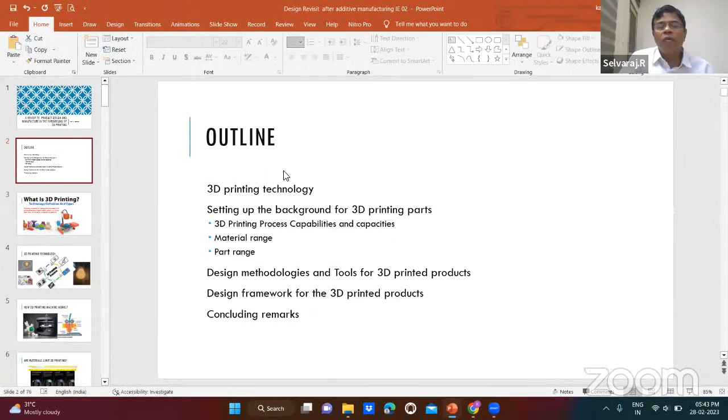Okay, so I'm sharing my slides and we will begin. Yes sir, please sir, please sir. Yes sir, it's okay sir. Okay sir, again go ahead sir.

Today's topic is of much interest because 3D printing technology is unavoidable now, and any technology will impact the products that humankind will use. Similarly, this 3D printing technology also has a very high impact on design. That is what we are going to look into. The topic can be looked at from two perspectives: one connecting with design, and the other connecting with manufacturing. So it is a perfect combination of topics so that we will get the benefit out of the technology.

My presentation will be structured like this. We will have a small review on 3D printing technology, and then I will set up the background for taking up 3D printed parts design. In that setup, we will discuss different 3D printing technologies available and their capabilities and capacities, the material range for making 3D printed parts, and the part design complexity range. Then we will have a small note on methodologies and tools used for 3D printed products.

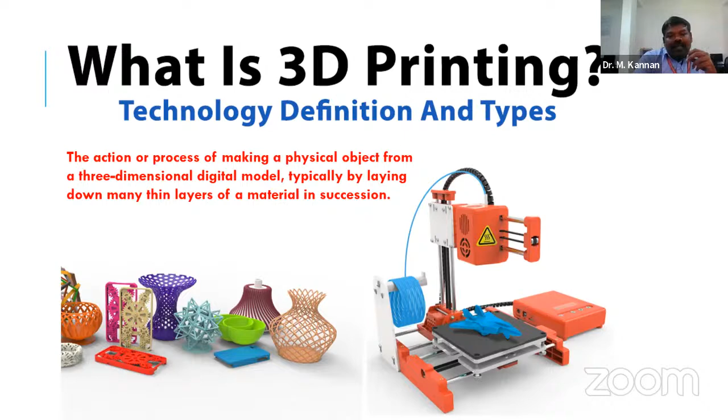The printing technology follows these steps: for any 3D printing, we must have a CAD model, and the model will be converted to a common file. There are a number of additive manufacturing file formats now being introduced, but still the very popular file is the .stl file, which is a tessellated laminate. This file is then supplied to a software called slicing software or material preparation software, where it is sliced, and the slices are converted to G-code so that the printing machine can print the parts. This is the general process.

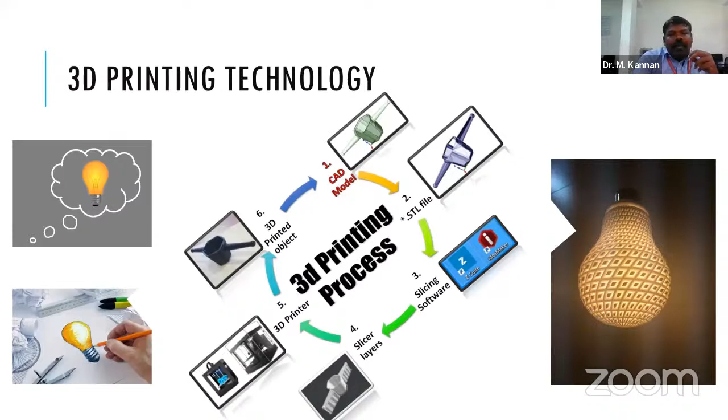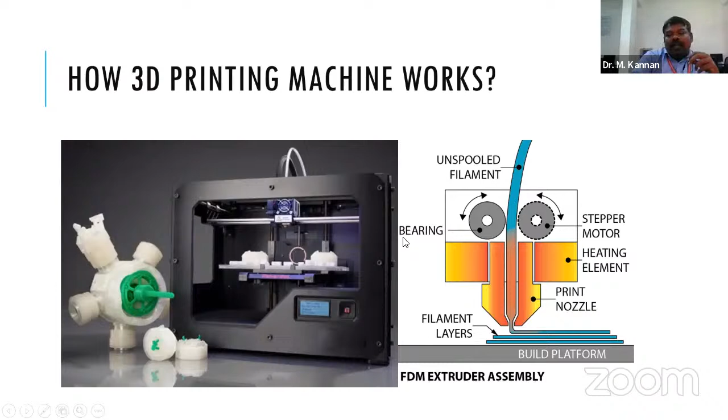To know how it works, this is a very basic 3D printing technology, and it is the earliest 3D printing technology - fused deposition modeling. It will have an extruder, mounted on a machine that takes motion in X, Y, Z axis, or it can even be fitted on a robot. So it acts as only a thrower of material, and it can be fitted with any moving machine so that we get generated parts.

First of all, we must know, is it limited to only plastics? That is not so. Surprisingly, you can see that now 3D printing can be done even with Inconel, the hardest material, and similarly we can even go for tool steel.

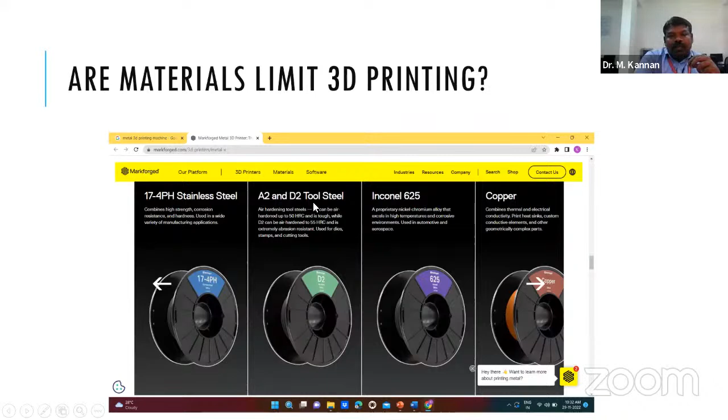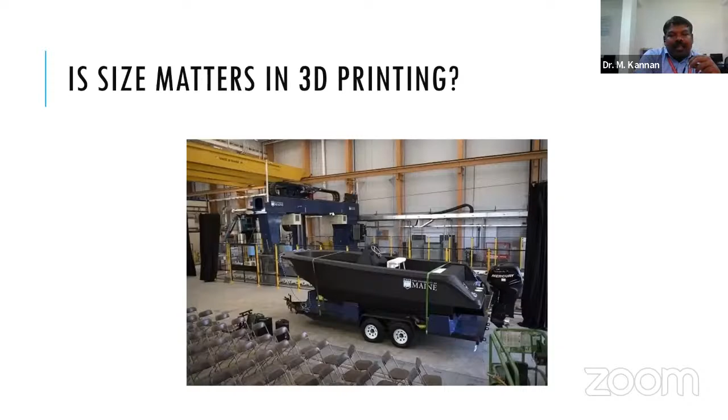Is size a matter of question? That also is false. You can see that a complete speed boat hull will be printed by the 3D printer, and the size also you can see how large it is. So size also does not matter.

And the capabilities - what you are seeing is a 3D printed heart, and on the other end you are having even 3D printing used to construct a home or large structures.

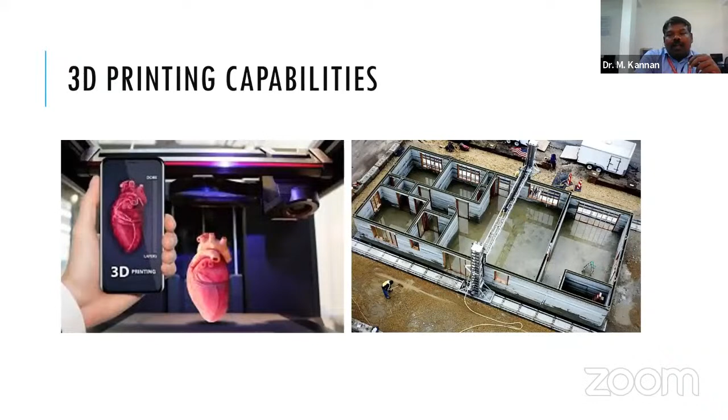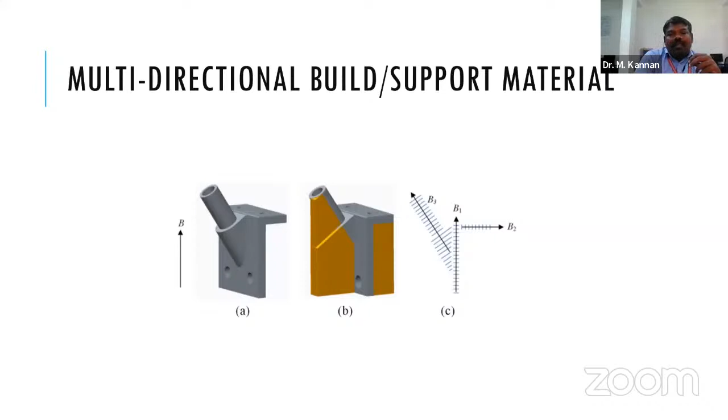Other capabilities of 3D printing - now we have a slicing algorithm that does multi-directional slicing, so it is not limited to any complexity of the parts. Altogether, this parts information is converted into G-code.

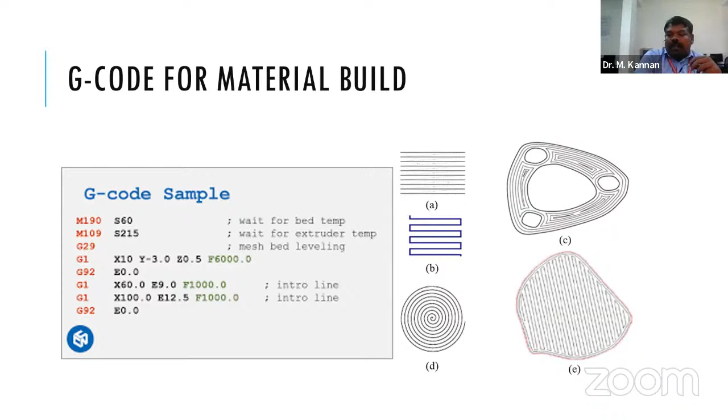This is to tell the viewer, the listener, how things are working. This is very similar to robotic machining or CNC machining, only instead of a tool, we are using an extruder, and there are other technologies also that we will see. In association with 3D printing technology, we have a 3D reconstruction technology hand in hand with it.

This is where designs come into picture. So the 3D printing technology has changed the whole scenario of design. In that case, all the parts, machines, or equipment that are available can be redesigned or re-engineered, which will save money, cost, and operational cost.

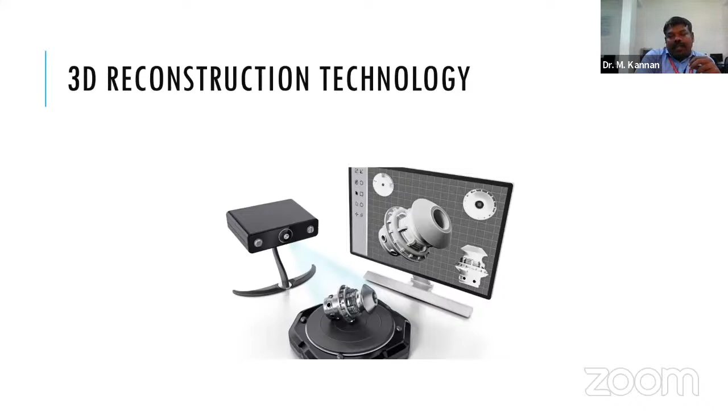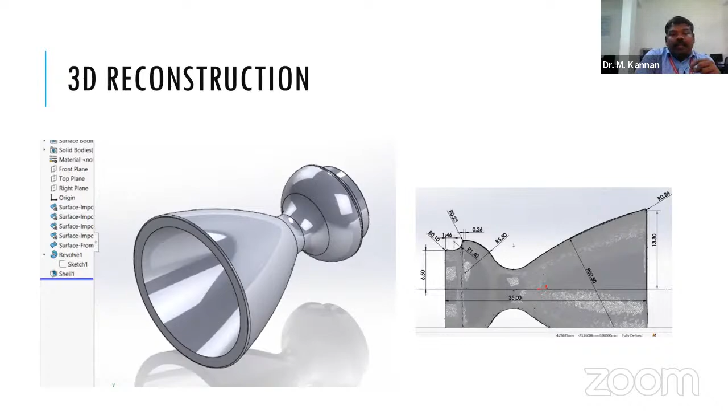For that, this 3D reconstruction technology is the one that will support it. So you need not have the 3D models - rather you can scan the model, and then it can easily be converted to a CAD model, which can be printed later. There are a number of tools available for converting the scanned object into CAD models. This shows you how 3D reconstruction technology will help you in capturing even a rocket nozzle.

Now we will take a look at the 3D printing technology ranges. I'm not going to cover the very basic plastic-based 3D printing machines. Rather, we are going to take up a complete spectrum of metal 3D printing technology. There is no limitation in usage of materials now, and you can see that even sheet lamination - the sheets will be cut for the required geometrical aspects, then pressed and heat applied to get a complete part.

Rather than only fusion, now we are having sheet metal lamination, stereolithography, and selective laser sintering. This 3D metal printing technology has completely changed the face of 3D printing technology. Earlier, it was only a prototyping technique.

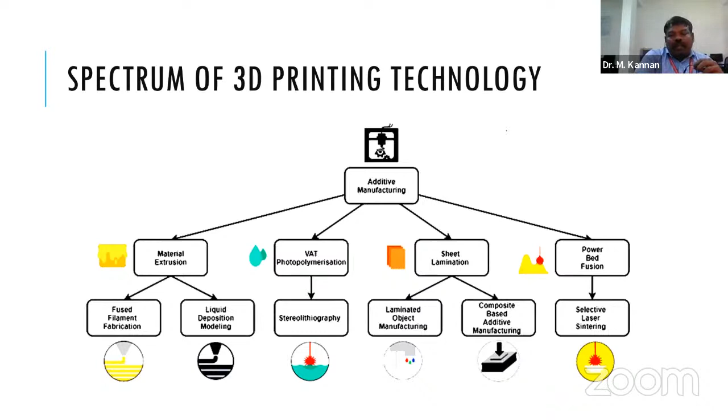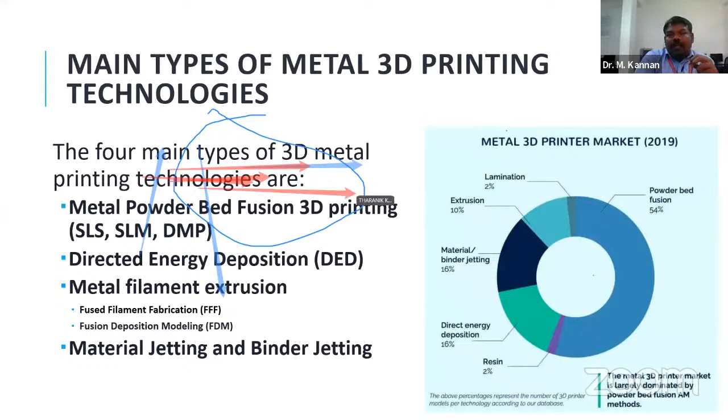Here, metal binder jetting is used mostly, about 16%, for direct part manufacturing, and similarly direct energy deposition is another method that can be used. You can see that resin paste is starting to become smaller in usage for real-time product manufacturing when it comes to 3D printed parts.

Someone is throwing up some scratches. Unshare it and share it, sir. That will be all right, sir. Somebody is playing. Please stop playing on the screen.

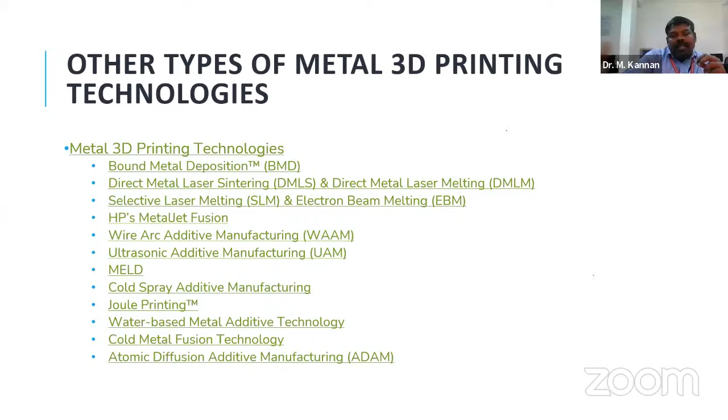These are the other range of 3D metal printing: bound metal deposition, selective laser melting, wire arc additive manufacturing, and even arc welding additive manufacturing. So you can imagine the range of products available for 3D printing.

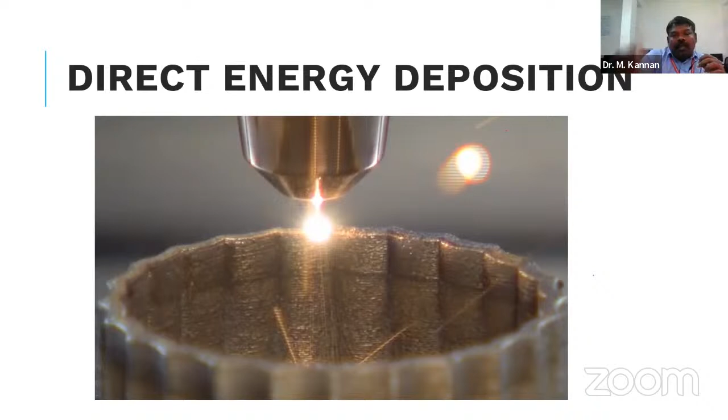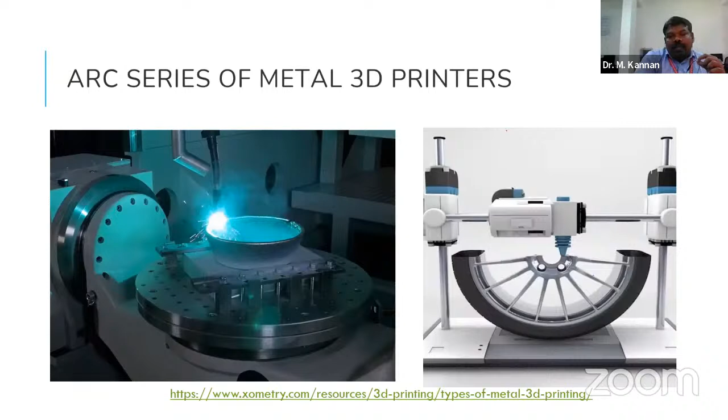This is the direct energy deposition method. It uses plasma for melting even very hard material to get fused. This is arc series lamination for getting a 3D print, and you can see a complete wheel which doesn't have any separate parts welded or jointed.

Optical and lens principles are also used. Electron beams are focused so that a very selective part with selective material and microstructural composition can be manufactured. So there is a high chance for controlling the microstructure, which we must know about, so that it's possible to manufacture a product sufficiently, independent of materials.

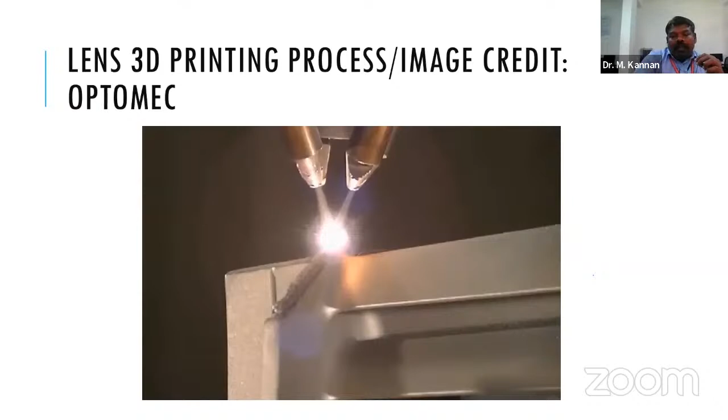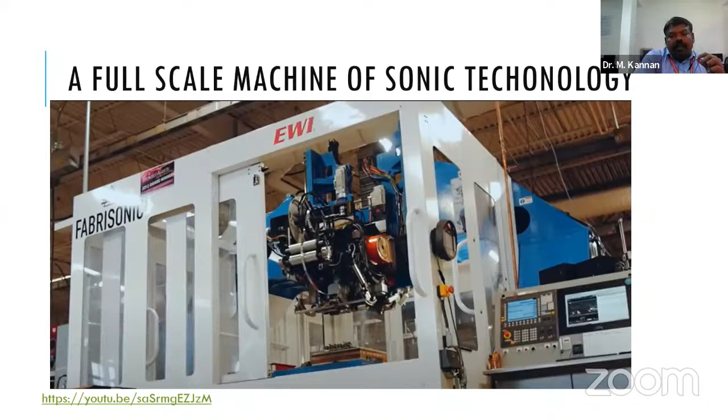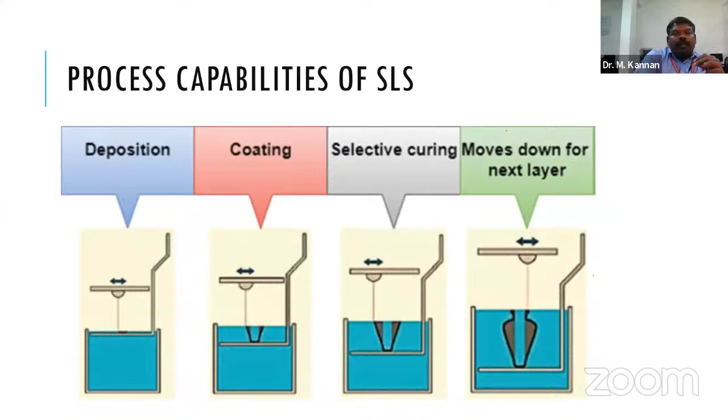So this is the capability of 3D printing technology now.

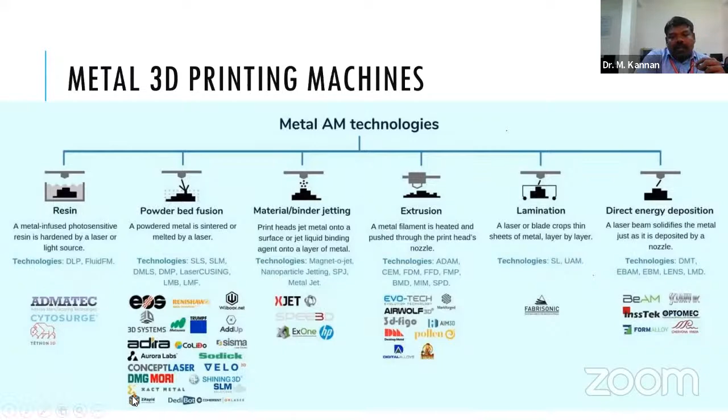This spreads out the spectrum of machine suppliers - different vendors providing different kinds of machines. Earlier, 3D printing had a limitation of speed; it would take a higher time to make even a single layer. Now speed is also being addressed, and there's a chance to use multi-material in part manufacturing, which frees the designer from material size constraints and allows optimizing design for strength.

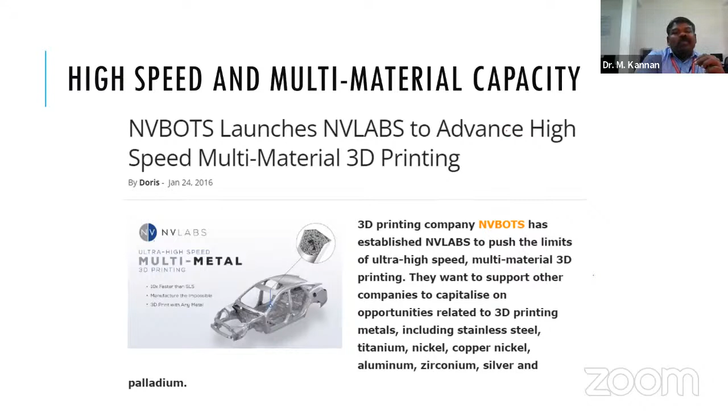So you can manufacture any size of parts or assembly together. 3D printing technology sets aside the need for separate parts and assembly - rather a whole product can be manufactured in a single shot. That is the present capacity of 3D printing technologies, so this is the range to understand.

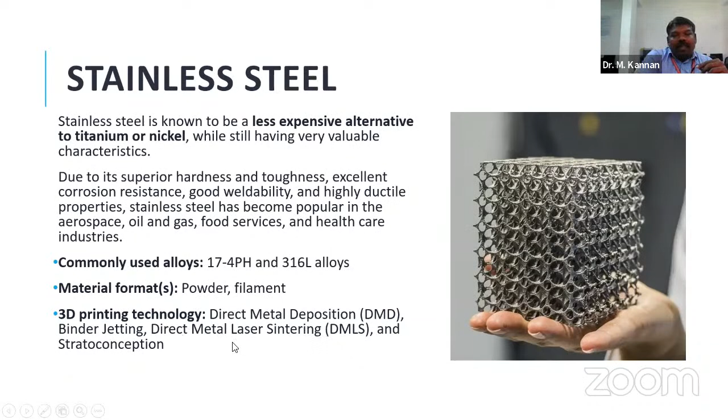I'm giving you the material and the supportive process here: direct metal deposition, binder jetting, direct metal laser sintering, and so on. Even maraging tool steel, which has high strength and fracture toughness, is available in powder and filament form, and the range of alloys is given here.

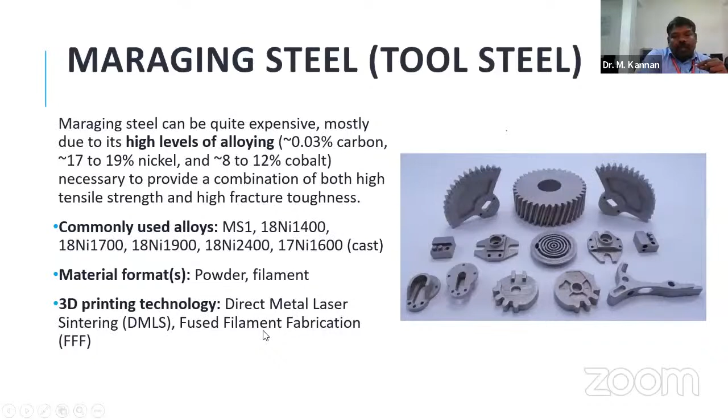Nickel-based alloy is also able to be processed in direct metal laser sintering and fused filament fabrication. This technology also supports carbon composites. Even the toughest materials and biocompatible materials like titanium are being used in many of the processes - it supports most 3D metal printing technologies.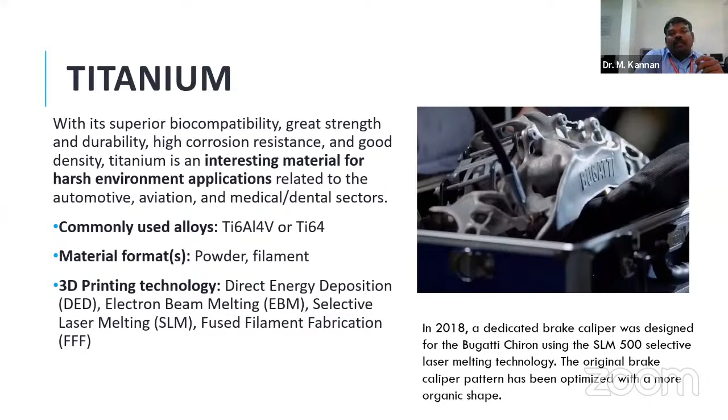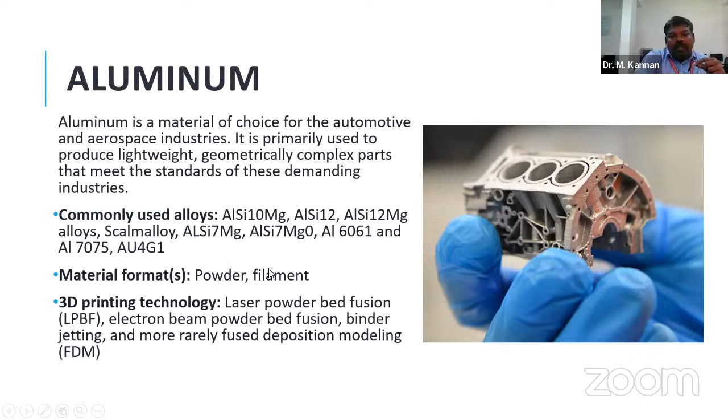In 2018, Bugatti developed a complete brake caliper using 3D printing machines alone - a whole assembly setup, which I can show you in a later part. You can imagine how much freedom this gives the design. Aluminum will also support most of the processes, and the range of common alloys is given.

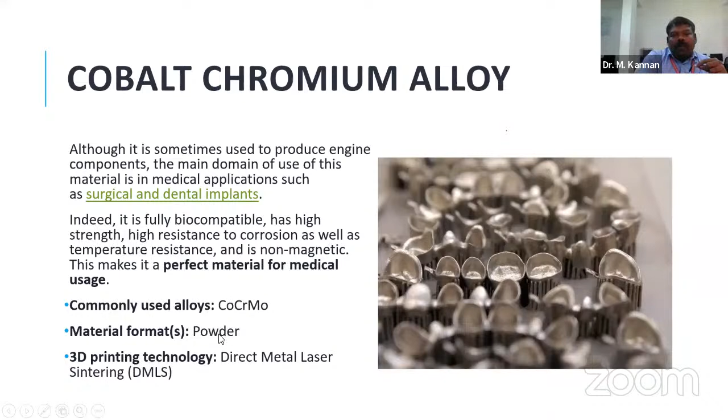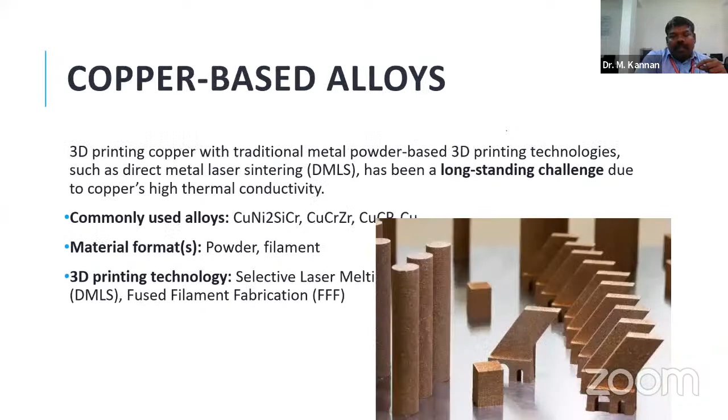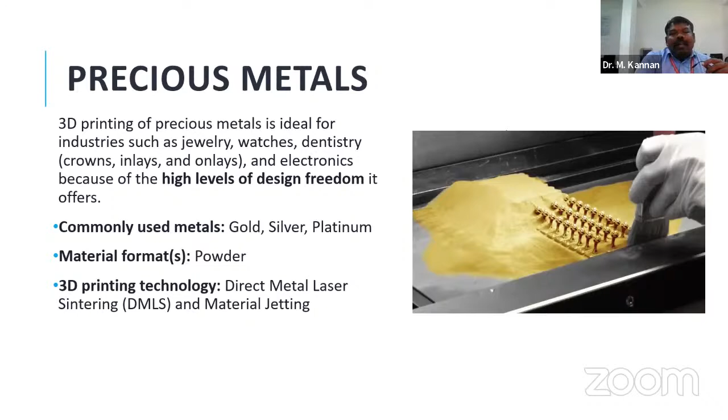So all the parts will be available mostly in both powder and filament form, except a few things. The cobalt materials is available only for powder form, and this will be mostly used in surgical and dental implants. Nickel alloys, and then copper based alloys. Even the precious metals - you know that in India, most of the economy relies on gold - and you can see that this can also be done. So this is setting up an independence on materials, and even refractory material can also be used.

Now our focus is on 3D printing, not on the 3D printing technology itself. Rather, we have to see how this technology impacts the product development and the product manufacturing.

Now I'm going to showcase some of the products that are manufactured with this metal 3D printing. This is the baseline you all have to capture: the technology is not only transforming how things are made, rather it also changes how things are designed. So that is where it is suitable for all the technology, and by knowing the capacity, you all are able to appreciate that additive manufacturing techniques have a very transformative effect on the product design workflow.

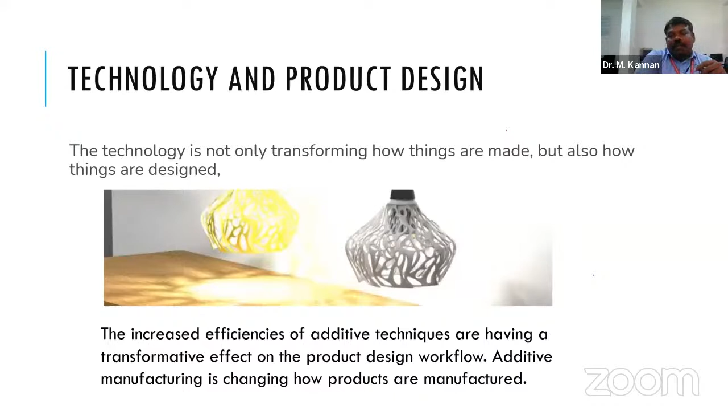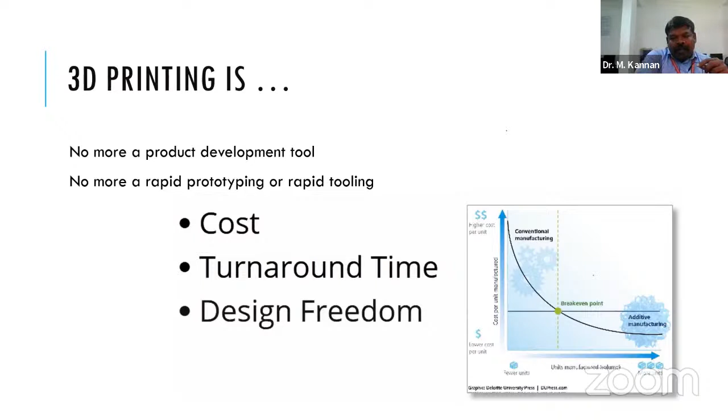You know that 3D printing is no more just a product development tool. Earlier it would be used to check only the functionality of a product, how it works at a smaller scale, and sometimes it may be used for rapid prototyping, that is in making tools and dies. Hereafter, they are not going to be only a product development tool or a rapid prototyping tool. It sets the cost in terms of material saving, cost of the product, compactness, and it also cuts down manufacturing time. It also sets design freedom for the designer.

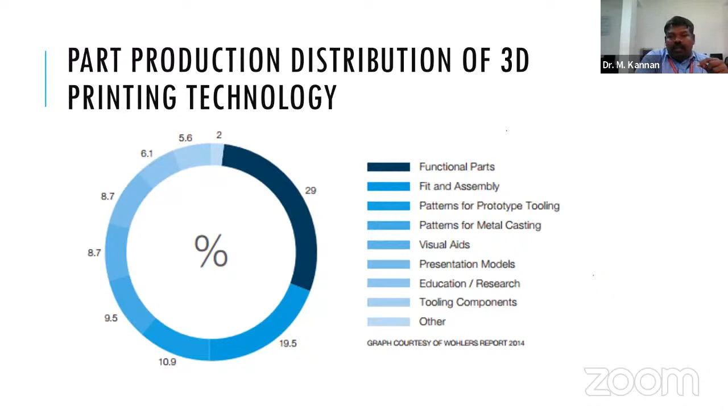This is to lay out the different parts that are being manufactured. So looking at part production distribution of 3D printing technology, you can see that about 29% of parts, the functional parts, are being directly manufactured using 3D printing, whether it is in a polymeric material, a metal, or a composite material. And then there are fits and assembly. So you can see that this is the scenario.

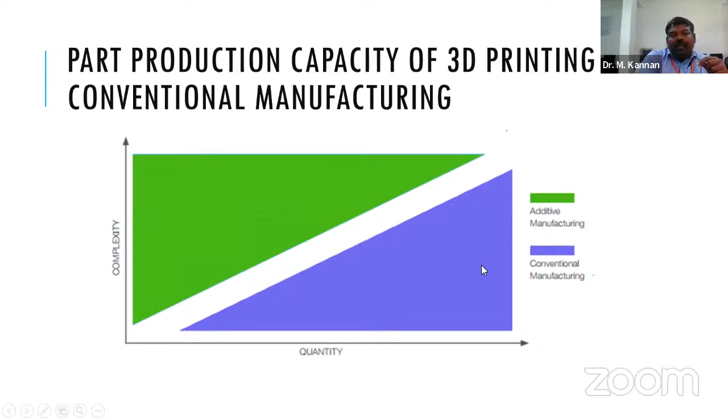And it is to be noted that 3D printing technology can also be considered and compete with conventional manufacturing. You can see that when it comes to complexity, additive manufacturing has its highest impact or highest hand in the manufacturing. Rather, when it comes to quantity, the conventional manufacturing methods will have the dominance.

You can see a sample part which is given here - say there won't be any weld, or there won't be any machining operation to cut this pattern. So the 3D printing machine gives an advantage of more complex design, reduced lead time, improved manufacturing efficiency, and higher quality parts in a single piece. That is what's important - the whole product can also be manufactured in a single shot.

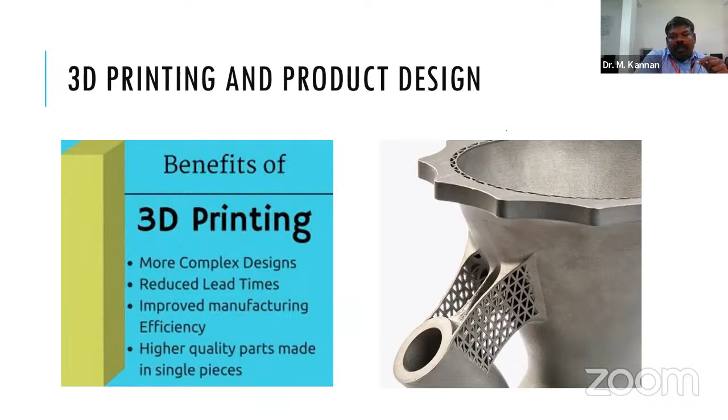And rightly, when we start - the president indicated that even turbines cannot be thought of, turbines are not even being considered apart from 3D printing. So what you are seeing is a part, and you can see the complexity. So it is independent of not only the geometrical complexity, it also is independent of all the machining processes. The part you are seeing is beyond casting and machining.

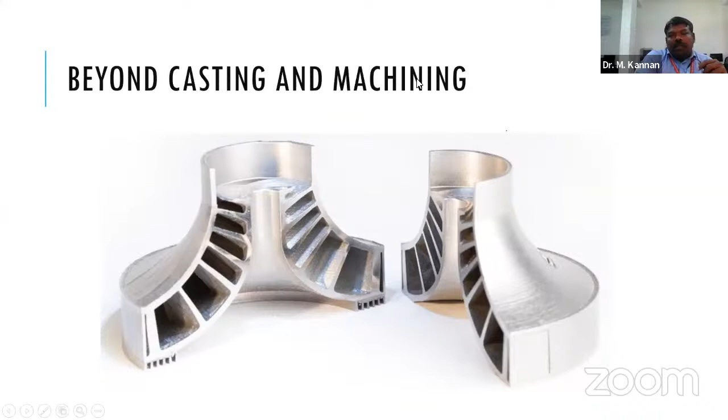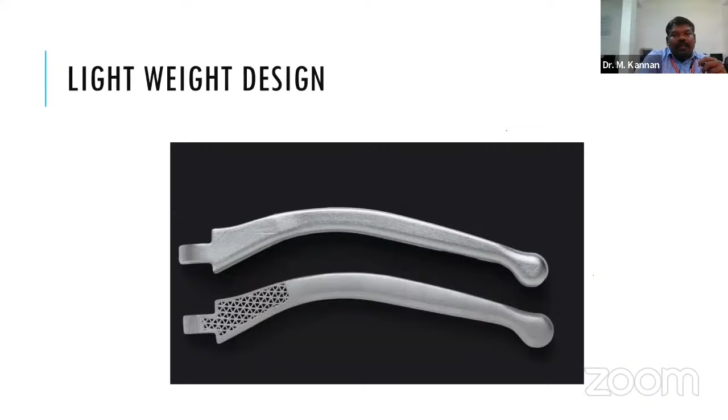And wherever possible, you can reduce the weight, so the design is going to be very lightweight. And this is what's very important.

You can see that the manufacturing restraint design versus free form design. So what we are seeing here is something - the part shown in black is the conventional part being designed for manufacturing restraint. We know that it has to be designed for either forming or casting capabilities, and then the machining capabilities, all will limit it. The material must be a continuous one, and the machining must consider different settings, and then it can be manufactured. So by considering all the design for manufacturing, design for assembly, the part will be designed with continuous material.

Rather, what you are seeing at the end is a product that takes any form, but still does the expected function. Say here it is a slot, and the slot is there, and it has to transfer the load, and it has to move on. So all the functional features and also the structural requirements are being met, even after saving huge material and weight.

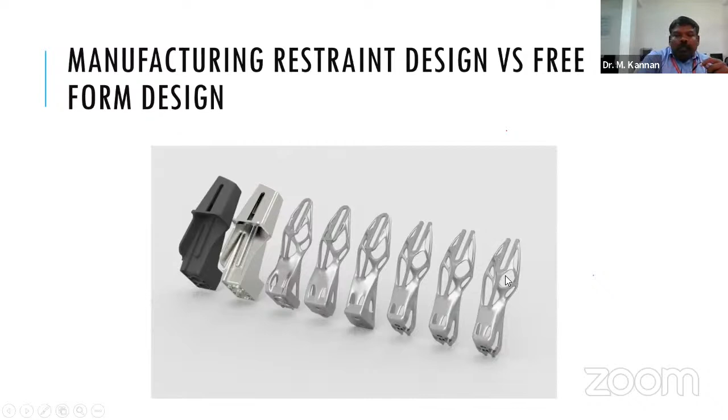In 2018, this award-winning design of a brake was developed by Bugatti, the French automaker, using a 3D printer for their supercar. You can see the complete profile in a single shot, and it is a single part, with all the complex shapes and curves running here and there. This also provides a chance for housing different electronic parts and other components, which is the beauty that 3D printing technology gives the designer.

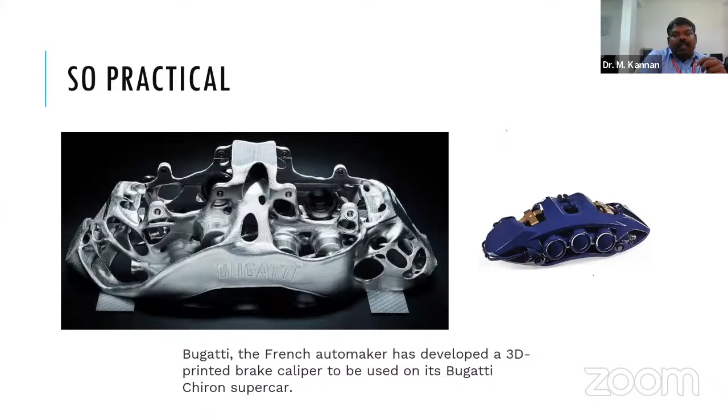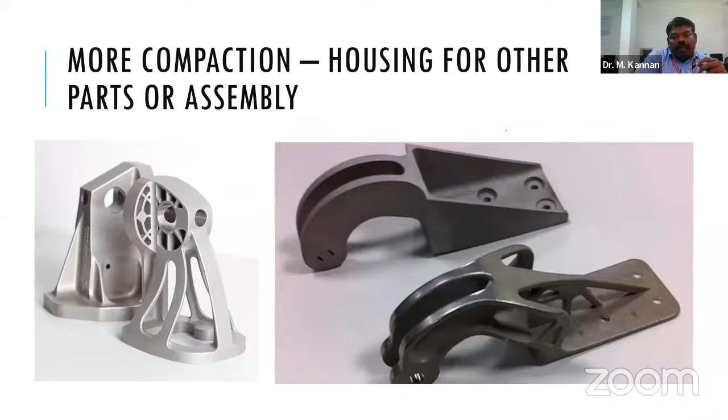You can see that these are conventional brackets, redesigned after 3D printing, giving a lot of room for housing other parts like a motor or electronic PCB ports, making the part very compact. We can even think of mounting a motor at any point in the same part by developing a housing for the motor and the belt drives.

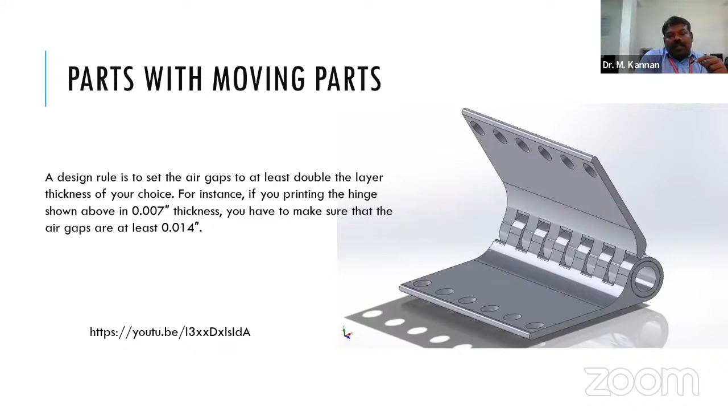We know that tolerancing is the toughest part in design. Here, additive manufacturing even touches that particular critical point, making it easy to have higher control over the tolerances.

Here is another assembly. I titled it the game-changing assembly technology, because earlier the whole part design revolved around how parts are disintegrated and assembled to get a particular motion or force transfer, and that brought in all the manufacturing and manufacturing tool capabilities. But what you are seeing here is a completely integral part that is manufactured, and what you see in between is support material, with the part oriented so they are not crossing each other, manufactured in a single 3D printing setup. Once the support materials are dissolved or removed using a post processing method, your outcome will be like this.

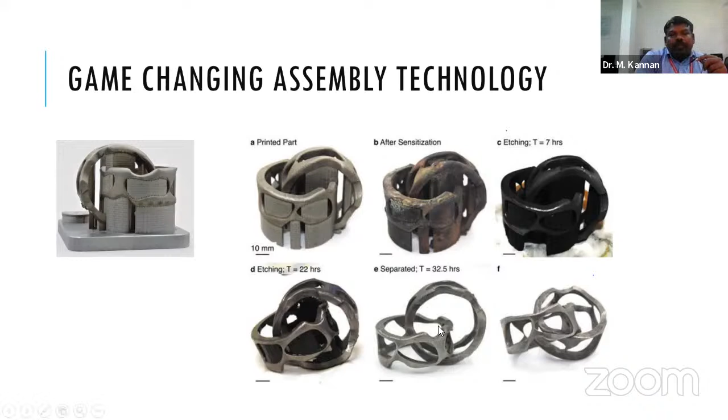And this is another thing. Earlier, when we put a design feature in any part, we had to consider machining and its machining access direction and so on. But what you see here, if you want to make these particular slots, it has to be set up in a different orientation, and the tool has to be controlled in 5 axis. In 3D printing technology, there is no restraint on the manufacturing setup or tool approach, as it is completely eliminated in the design. This product is purposefully put together, and you can see that holes of a very fine diameter to a larger diameter can be done in a single shot. This is considered a test product for any 3D printing process, which is why it is given here.

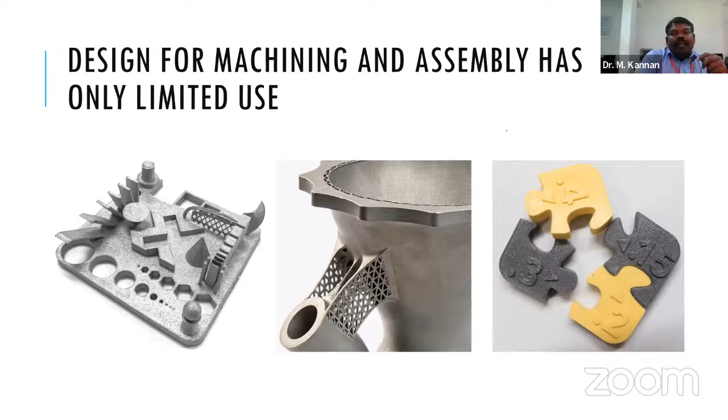So design for machining and assembly has only limited use in the 3D printing technology background. Now, with this background, I listed different manufacturing capabilities of 3D printing technologies, and the part and assembly capabilities, so that you can see the part can be designed for any geometrical complexity and any combination of material. Similarly, the conventional pattern of assembly can also be completely questioned now.

With that background, we will go into the design methodology and tools used in 3D printed products. The additive manufacturing or 3D printed product design will be set for freedom - complete design freedom from manufacturing techniques, in terms of constraint from manufacturing. So design for machining, design for assembly, is being questioned here, and in terms of structural design also, it need not be only a specific material size and strength. Rather, 3D printing can be adjusted, and the restraint, part complexity and internal ribs can be adjusted to get sufficient strength for the structure.

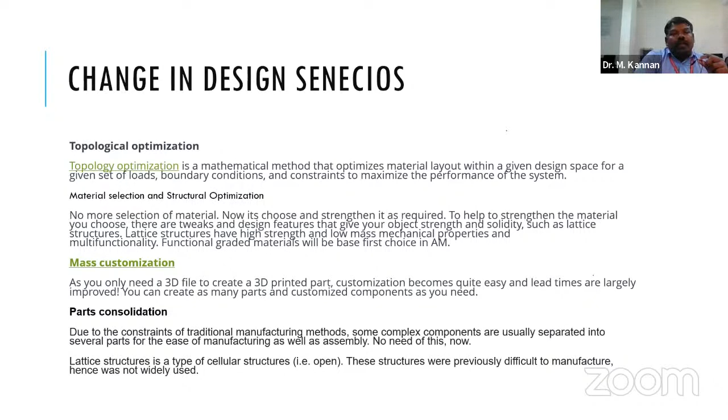Clearly, what I want to emphasize is that design optimization is now challenged in the background of additive manufacturing, because you can see that additive manufacturing metallic structures with the same macroscopic shape and size can be fabricated by different process parameters, having strikingly different microstructures and hence the mechanical property.

That means the structure is independent of material; rather, by controlling the process and the parameters used in the design, any structure can have the necessary strength, and the property can be created or designed in the manufacturing itself. That is very important.

As we go for selecting selective laser sintering, powder metallurgical sintering, or fused deposition, we are going to have control over each and every point. At each point, what material is deposited, in what combination, and what density it is deposited are all controllable in 3D printing technology, so that the necessary mechanical properties or strength can be brought in.

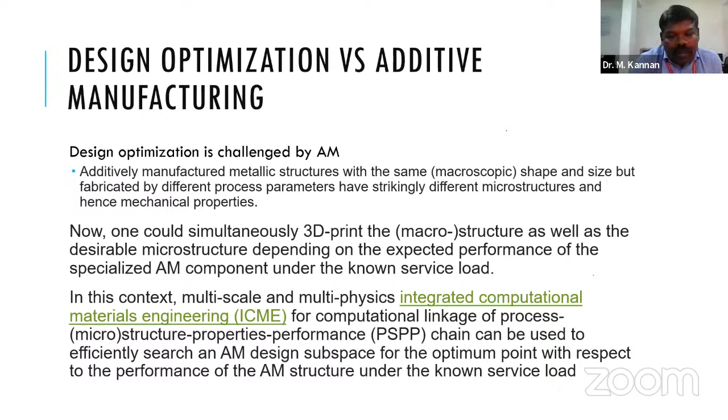I'm not going to talk about design for additive manufacturing that covers overhangs or bridging, support material or number of layers and so on. Rather, we are talking about the product in the whole product development and manufacturing process.

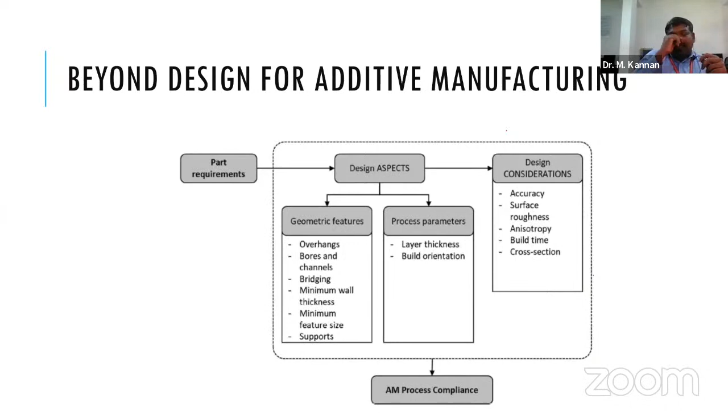Beyond design for additive manufacturing, as you now understand from my earlier discussion, the design style is completely free from any constraint, either geometrical or manufacturing-based. So a broader choice of shapes and configurations is now open for the product designer. Similarly, you can think of fabrication not linked to geometrical complexity, so that one-step manufacturing is possible. Similarly, when it comes to structural material, it is suitable for any advanced composite or functionally graded materials.

So the material strength is not being considered, rather only the product requirements or load requirements will be considered. Only topological optimization supports this. This is the design volume, and this is the load that comes in, so it can build up material according to the stress flow. If a particular point requires higher strength, it will build up material, or the density will be changed, and accordingly the same structure can be printed.

Very importantly, the structural mass fraction is where, wherever you want, you can minimize structural weight, and wherever required, you can increase the strength. So we can go for optimizing both configuration and part topology.

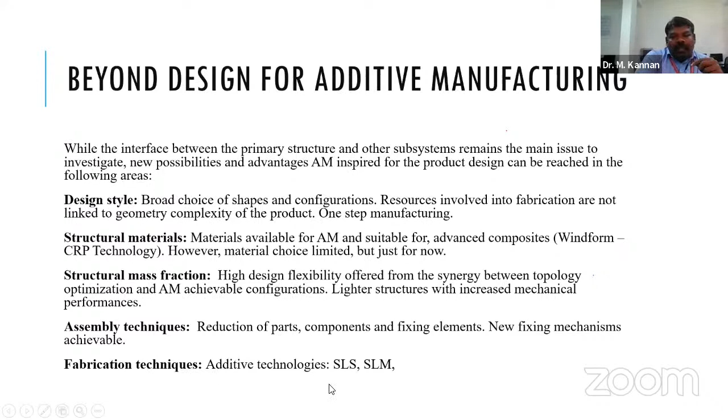New fixing things have to be evolved, along with fabrication techniques, since there are ranges. So now the question has changed. Rather than part, assembly or machining constraints, now it is a question of how the part is partitioned for the limitation of the available material scale.

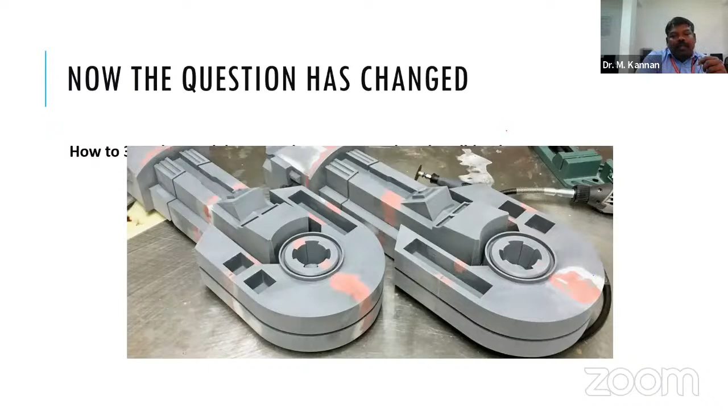If the platform supports only 1 meter and your product is 2 meters long, how am I going to split the part and manufacture it? That is the question. Then how is it being machined, scheduled, or processed.

So AM suitability comes in terms of value analysis, because we can re-engineer any product or parts in the background of AM. AM means available material range, or material match. So we have to check if there is a material match for our product application. Does the product design fit within the envelope of the hardware? That means size. These are the questions to be considered while designing the part.

So that is what I told you - the design has been completely revamped for 3D printing technology. Can product functionality improve when applying product design modifications like part customization and lightweighting? That means use of internal channels.

This will be based on topology optimization, functional integration, and other things like part consolidation. We are also using surface structures - the use of designed surfaces. The surface can also be critically manufactured using additive methods, through the combination of material and process parameters like heating and the energy supplied at a particular part. Use of multi-material and gradient material is also possible.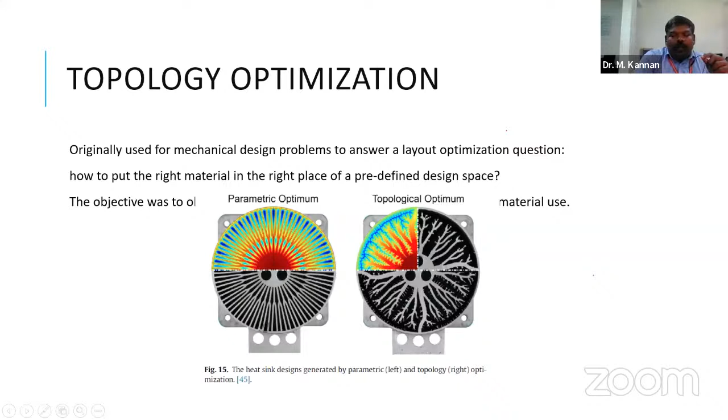So to make heat transfer effective, even the structure need not be in regular shapes, like this, so that it can be distributed evenly and smoothly. Rather, what you see here is some part will be in another state - from the center, it is moving towards the outer in a smooth flow of thermal heat radiation.

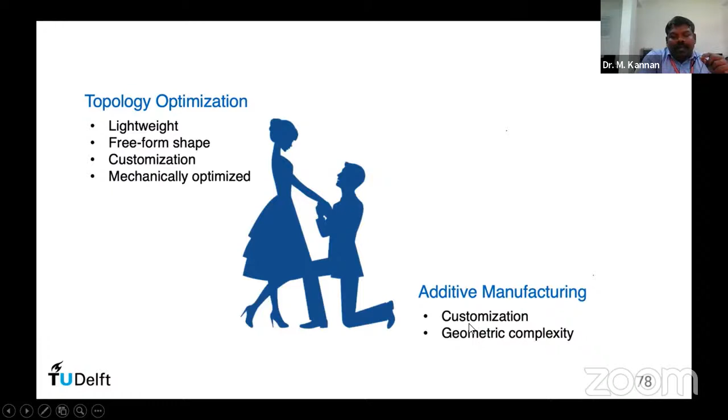So topology optimization is the technique or tool currently used for manufacturing the design of products in the foreground of additive manufacturing or 3D printing technology. It is used to lighten the product structure and components, develop freeform shapes and customization, and it's also used for mechanically optimized parts and part combination. So this is the advantage of topology optimization when used with additive manufacturing for customization and geometric complexity - you get a higher effective product.

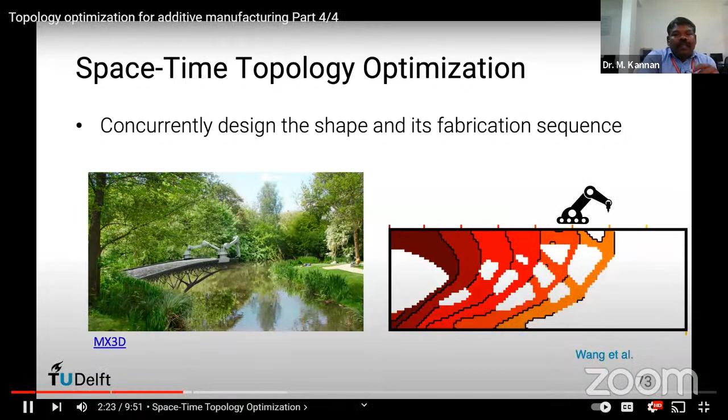Earlier, this functionally graded material was considered a very costly process, because how to consolidate the material was under question. Now it's realizable using 3D printing technology, and you can create a part independent of material size. For a chosen material, we can customize the structure controlled for necessary mechanical properties, including surface qualities, surface requirements, heat transfer requirements, or structural requirements.

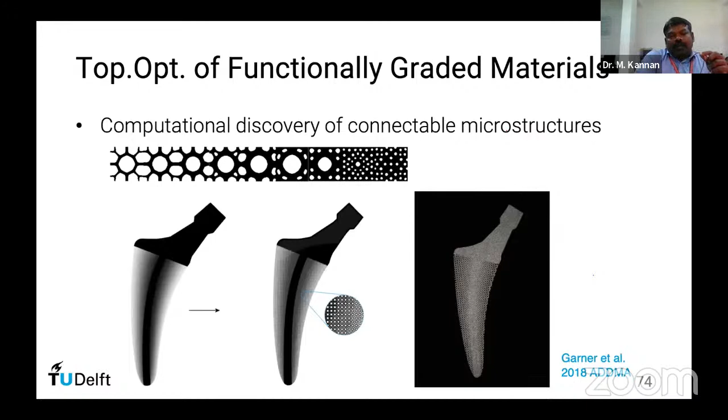What you're seeing here is conforming to the lattice structure. In any topological structure we apply loads, and the loads are detected for their stress flow - the material with less stress will be removed, and the portion closer to the set references will be retained. When retaining that, if you're using a lattice, meaning a cube is considered, then you end up with an integrated configuration where both structure and configuration are optimized.

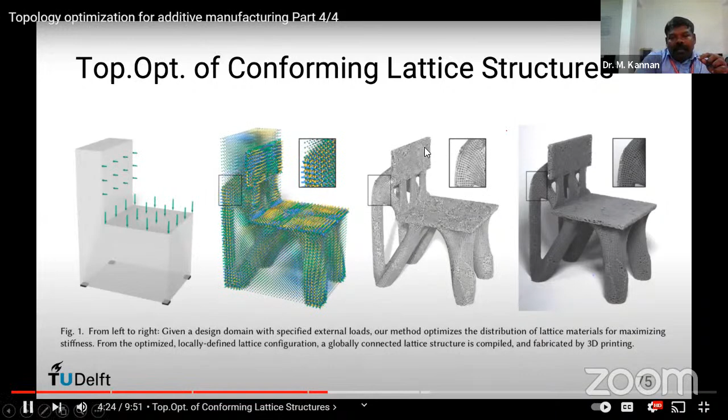So this is the impact of topological optimization on the AM product. It completely avoids including joints and other similar aspects.

There are a number of tools available, you can take note of it. For 3D printing design, topological optimization tools are being introduced by high-end software providers like Dassault Systemes with Tosca, Altair, and Siemens NX11 also has these options to design a product for additive manufacturing.

This gives an interactive design, so it can be a little more effective in terms of human thought process involvement in the design.

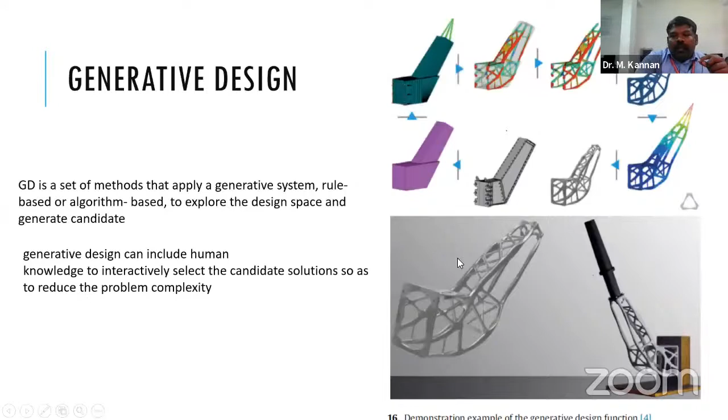Now the design also needs a complete change. I'm not able to simply apply a load and find the stress reflection. Rather, the design theory or design equations, which are all for homogeneous and continuous structures - for a continuum structure - cannot be directly used. That's why we need to think of an alternate method of design.

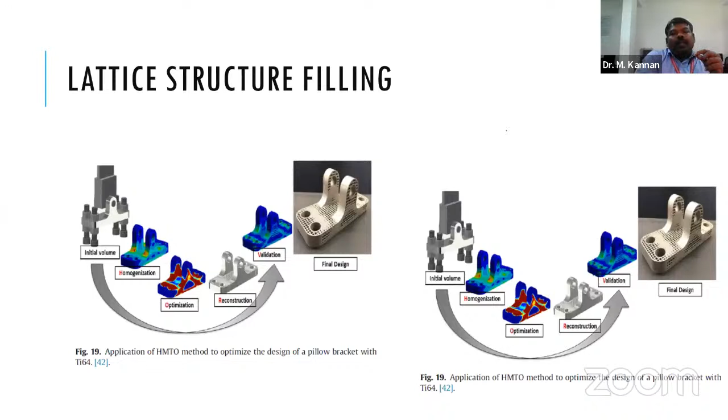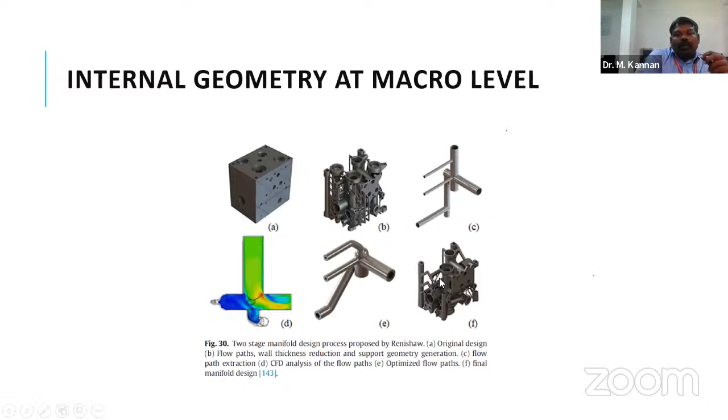With this background, we know the frame of focus will now be not material size, but rather part reduction or part consolidation. It's also about how we design the part for functional requirements in terms of topological structure and graded materials.

Now the question is, when it comes to design, the frame is not a separate configuration design and structure part design. Here both part and assembly have to be considered together, so that wherever possible I combine the part and the functionality while maintaining functionality.

There are a number of procedures being investigated by scholars, rather than only the configurational design done independently and then converted to a structural design. Now it's being done together, so you can see an assembly with no locking or pins, manufactured as a single set.

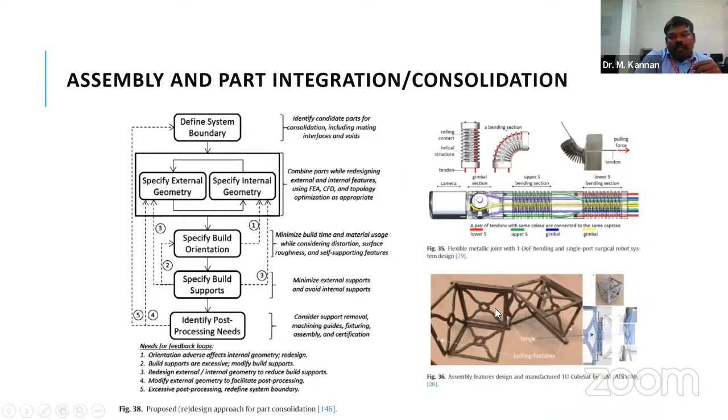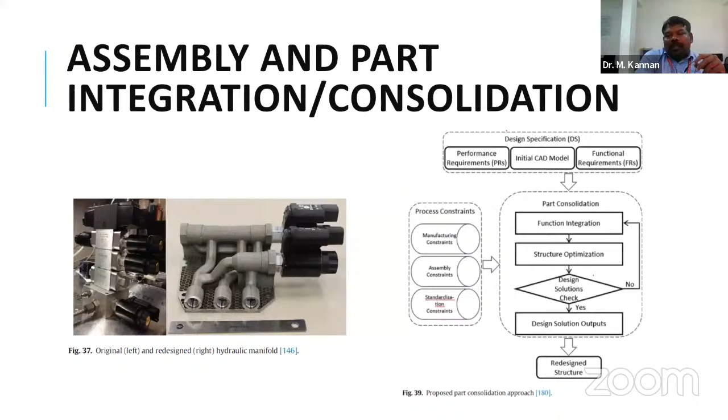In the foreground, a CAD model is there, and topology optimization will be used in part consolidation and function integration. This is the final design procedure that will be adopted for integral structural and configurational design.

In the structural design, topological optimization will design including material composition, gradings, and strength. So you see the workflow: we have the model, then use CAE and topological optimization, and based on AM constraints get a CAD model, which is converted to G-code and manufactured in a single shot, including integrated assembly and functional parts as already shown.

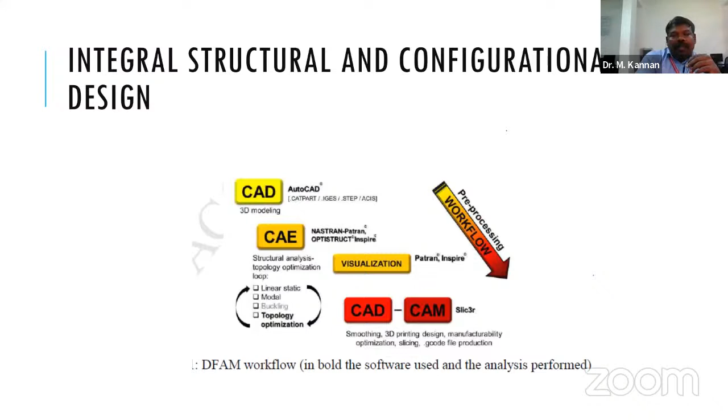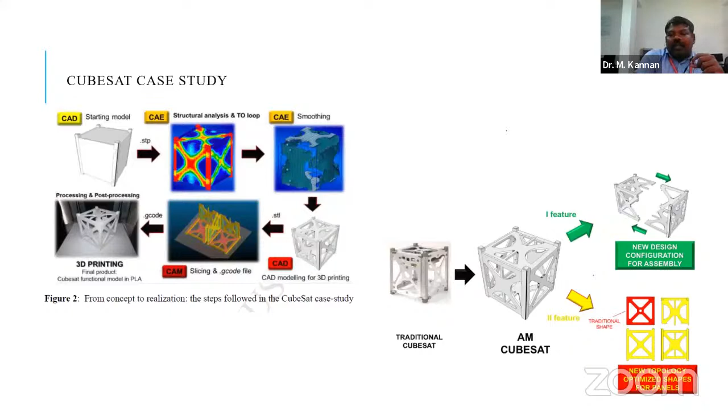This is a case study - I've taken a very simple object, a casing of a CubeSat. The question is how integratedly I can make this component without any joints, and what you're seeing is the final product here.

With this background, I'd like to conclude stating that any 3D printed product design will look into assembly logic analysis. This is what we must consider, rather than the earlier design-for-assembly approach. Now we go for assembly logic analysis - how I can assemble the part with minimal joints without affecting function. This is one step we have to add in design and manufacturing of any 3D printed product.

The second thing will be partitioning methods and optimization in support of assembly. You can see this cube can be partitioned in many different orientations and perspectives, so that has to be analyzed and finalized to make it with minimum joints and minimum manufacturing time. Then the interlocking design and optimization.

If the partitions are finalized, each part will be manufactured separately, and when it comes to interlocking, you can see these white parts - only 1, 2, 3, 4 numbers of joints, and the whole assembly is able to be fixed. There are a number of scenarios you can consider.

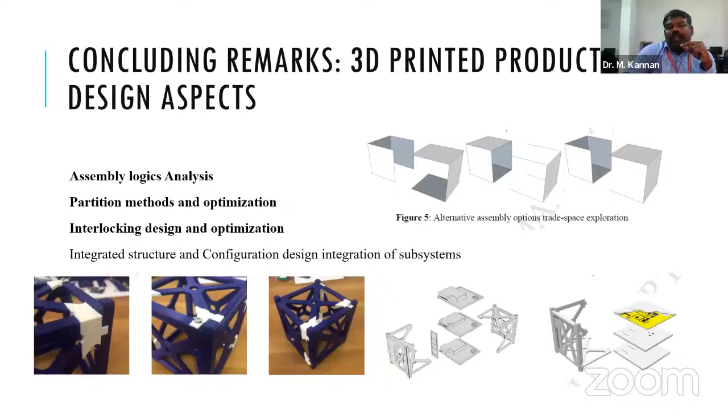That is what. Thank you very much sir for your presentation. Thank you sir, thank you. Thank you sir, very nice.

Also, materials can be superimposed for the manufacturing - where there is more stress, we can add more material, like on a cap and so on. That was very nice.

Designing and other things, we can rightly superimpose the simulation design into the product. Yes, sir, very nice presentation, sir. Thank you. Everything is very nice. Thank you so much, sir.